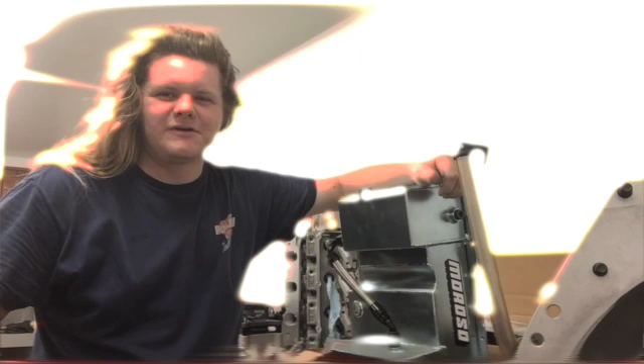I'm Nick Kiefer. In this episode, we're going to check out the build of this tubular back half. Alright, let's build a back half. Got my main frame rails all drawn up.

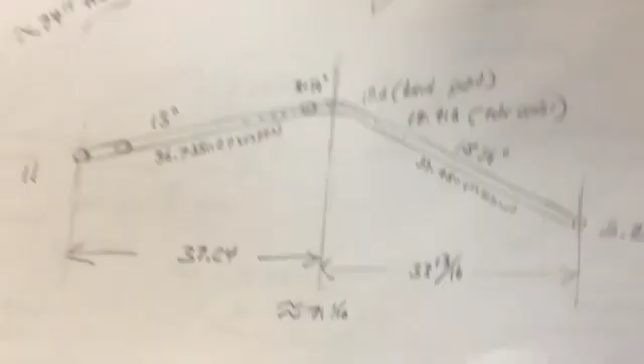And got plenty of space to put them, so I'm going to kind of make an assembly to make sure everything's square. When I put it into the car, it's going to mount up to the number 15 bar there at either of those points where those upright number 18s go, and it's going to have a cross member that'll tie right into that cross member there that I'll put in later.

So it's going to have plenty of other stuff triangulating it and bracing it, but that's the main gist of it. But for now, I'm bending a couple curved tubes with some cross members and a crossbar for the back that I already cut and cleaned up.

And the parachute tethers and rear bumper mounting locations and all that will go to that tube, and that'll go across the rear at the back of the rear frame rails. So I'm about to cut them and bend them and then set them up and start making that sub assembly.

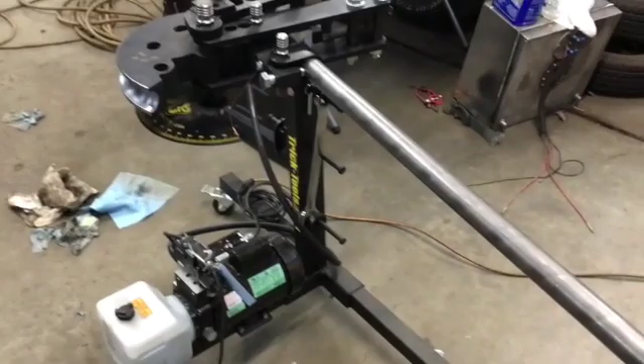Got the tube all set up for the rear frame rail. Got it zeroed out. It's time to give it a bend. And I'm gonna bend the other one and compare them, and obviously try to hit my target angle 31.5 degrees, but more importantly, I want them to be the same.

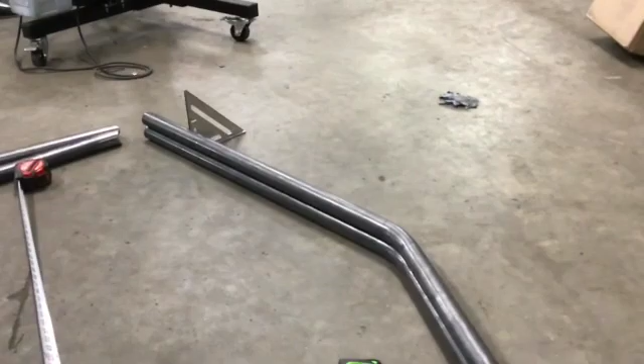Getting the rear frame rails notched and just checking to make sure they're congruent, and getting ready to make the notches at the other end here. I got these two cross members made up in addition to the rear cross bar there. So next I'll be able to set it all up and tack it up and get it started once I make those notches at the tail end here.

Alright, getting ready to notch the rear of this second frame rail. Got this one notched up on both sides, and gonna cut that one and then dress the end and make sure they're congruent, and then everything should be ready to tack together.

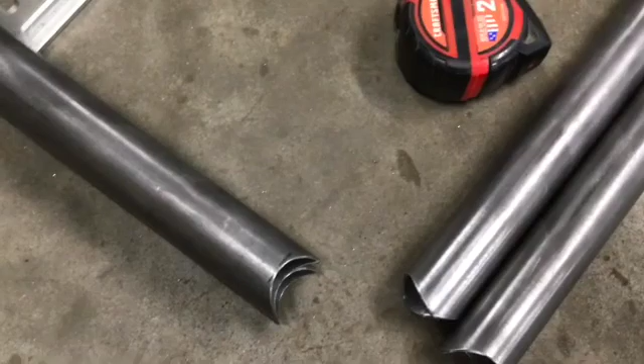Alright, sweet. Got them cut and cleaned up and matched up. So they are a perfect pair. And next, clean the ends all up, clean the insides of the tubes up, and wipe everything down and square it up, stick it together.

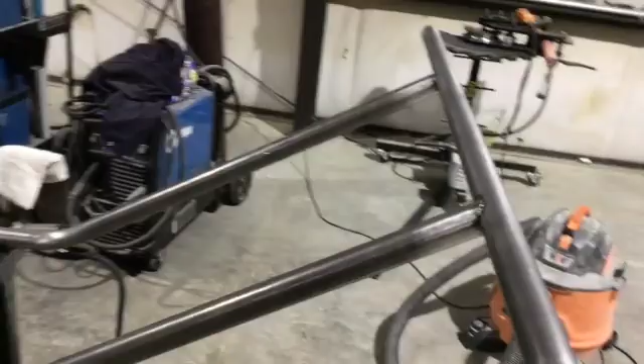Got the main part of the back half tacked up here. Went over to Cut Snake Composites boats to use this nice welding table. Set everything up nice and square. This is still floating, so I can position it where I need later. But ready to fit up in the Nova.

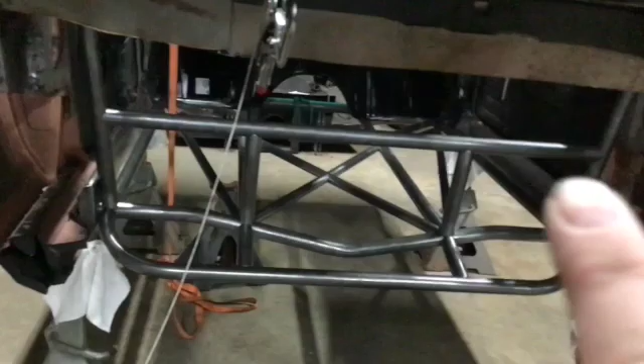All right, back from Cut Snake Composites boats. Getting ready to size this guy up for the Nova here. I need to support the rear of this and in the front, line it up. Those notches fit onto that number 15 main hoop crossbar there. I'm gonna notch these number 18 little uprights here to fit around it.

Everything is kind of coplanar just to keep it strong and all tied together, but it lays on the floor nice and flat, and it looks great. So one almost mistake I made was I did not drill the gas expansion holes for welding this tube in, and I've not drilled this either, but I'm not sure exactly where I'm going to put that. I left it loose so I can still kind of move it fore and aft.

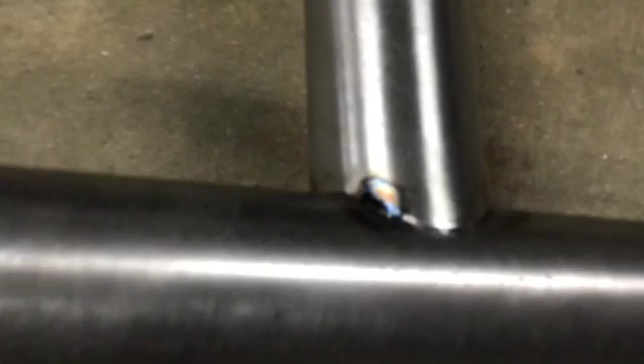So I went ahead and I just drilled them from the outside through both sides of the tubing on both sides, and when I complete the weld and everything's good and sealed up, it won't blow that last bead out. While I had this on the table, I was able to get some nice beads with a couple of dabs each, and some of these joints I put 4 more tacks on just to take advantage of the fact that it was being held nice and flat and square on that table.

So hopefully, since I burned it in pretty good, you can see I just kind of went for a couple little 2 bead stitches on that, hoping that it'll hold nice and true through the process of welding it into the car and moving around into position and everything.

All right, got the rear frame rails mocked up in the Nova. Just working on kind of making sure everything is square and level and all that.

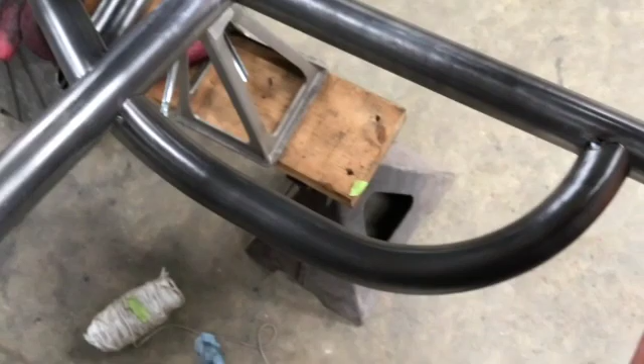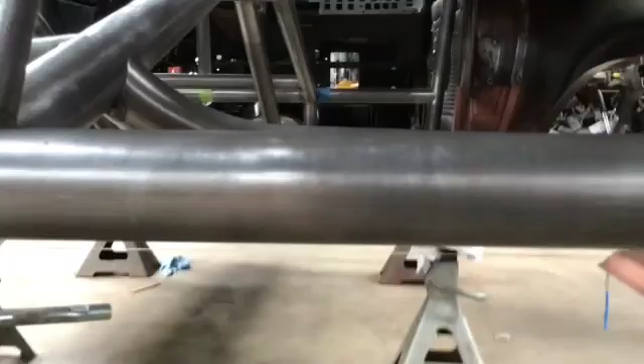All right, so we're going to check out how I made these gussets here that are going to support the rear bumper area of the tail panel that goes under the tail lights across the back of the car here. And I made a pair of them, and they're bent so that this part is level, just to fit with how I want to do the floor in the car. The outside of it is going to be level.

It's kind of going to make a triangle, and then another triangle will go up on the tub up to the frame rail here. So I've got a slideshow that I'm going to play, just showing you some of the processes that took place to make these.

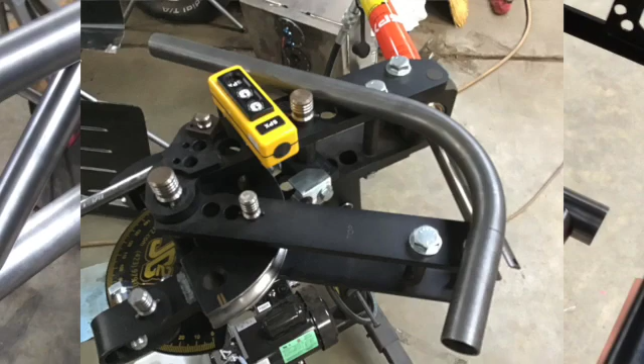So I started by bending, this is 1.5" .065 wall tubing. It's a little smaller than the 1 5/8 .083 wall tubing that I use for the main parts of the frame, but it's a little lighter, and it's what I like to use for a lot of the gussets and stuff. So there's a couple kind of tricky bend operations in the tubing.

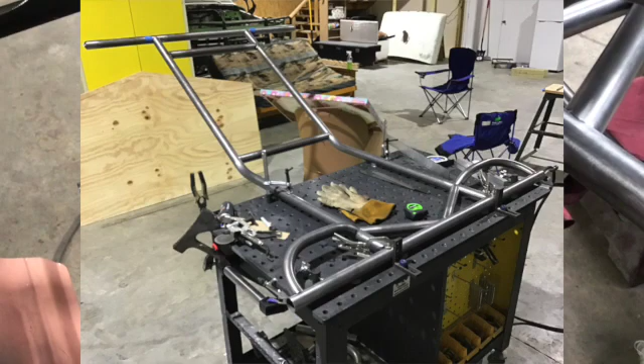The reason I did the tube as I did was for when I went to notch it, it just kind of made the notches a little simpler and easier to line up with the rear frame rails and the rear cross member that goes across the rear of the chassis. And now we'll check out how I used the welding table over at Cut Snake Composite Boats to get these lined up and tacked into the chassis.

Back over at Cut Snake Composite Boats, welded up the gussets for the rear bumper area on the back half. So I still had it loose where I could pull it out of the car. This slides into the main hoop on either side. And measured the angle on these and shimmed them up and got them right where they need to go.

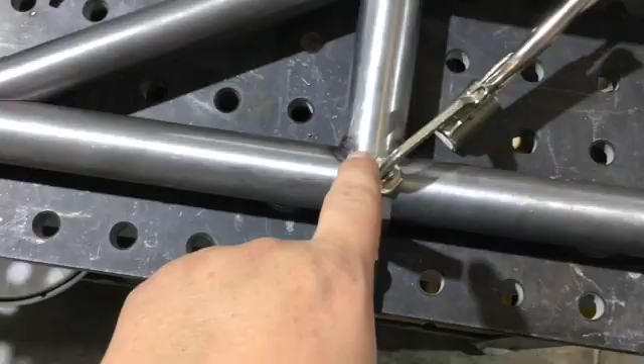I needed to preload this tube just from welding it to the main frame rails here. It had warped just a little bit, so I've got these guys pushing it straight with these guys holding it straight. And pretty straight. So that's nice, got it all tacked up. And time to stick it back in the car.

All right, got the back half back over at my shop, and I was just working on welding where the little tubes are going to tee into this. These two joints that go down to those joints on the main frame rail. I wanted to close them up before they're covered up by the tube. And I welded these up a little bit just to make sure I seal them up before they're kind of hard to get to.

This is the bottom of the back half, so this stuff I'm leaving tacked. I want to get everything in place before I start putting too much heat into it. Get everything reinforced with the upper rear frame rails and stuff like that. So I'm gonna let it cool down, and then make sure this tube is cleaned up. It's actually a number 15 main hoop crossbar, but make sure that's cleaned up inside and out.

And on the tips there where it welds to the main hoop, got a couple hose clamps situated to catch it height wise, and I'm gonna go ahead, and when I put it in there, I'll give it a couple tacks and then get ready to work on kind of the upper part of the back half.

I'm gonna do a hoop in here, obviously my down bars, then some upper rear frame rails and stuff like that. The top of the back half ties into the main hoop, and eventually the door bars and A-pillar bars and all that via this rear hoop. And so we're going to take a look at how I bent and notched that, starting off with our first bend, and then second bend, and it just has those two bends. And then I'm going to show you how I notched it and fit it up in the car.

All right, I made the first bend and just measured everything out to make sure the angle's right and that all the dimensions I'm getting right, and we're looking good. So I'm gonna stick the other side in the bender, and I like to bend kind of from the center on stuff like this so that it's more symmetrical, because the bend looks a little different at the end than the beginning. So it's just nice to go kind of out from the center.

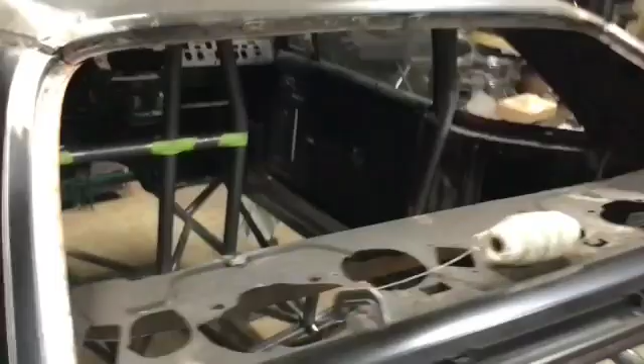All right, got it all bent up, 72 degrees on both sides. And now it's time to set it up for some notches so I can get it fit up to the main hoop. Got it set up to notch. This angle is 11 degrees and this angle is 10. And that is to account for the main hoop lean back, as well as the angle of the lower parts of that hoop, where that hoop's gonna go onto, where that meets up.

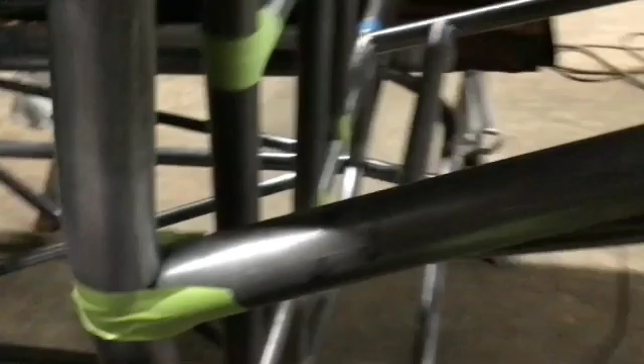All right, one notch down and one to go. I'm gonna cut this thing and we'll see how it fits. All right, I've got the rear hoop mocked up after notching it, and fits pretty well. It actually kind of clicks in because the notch goes far enough inside. I'm going to tweak the tubes a little bit to bring them together. I've got it tucked in there, but it's sprung out just a little wide, which is good.

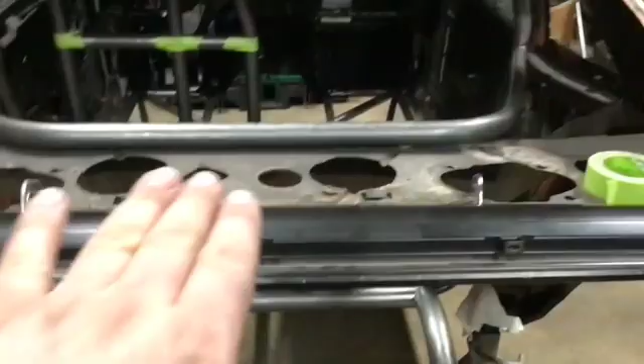This package tray isn't really even. You can kind of see it's sagged right there, but looking at everything else, I've got it pretty much set up level in here and it looks pretty good. I've got the rear hoop fit up and notched up nicely. It's looking good. Been working on making sure everything's nice and level. Got the notches looking sweet, and pretty much cleaned up and ready to tack on.

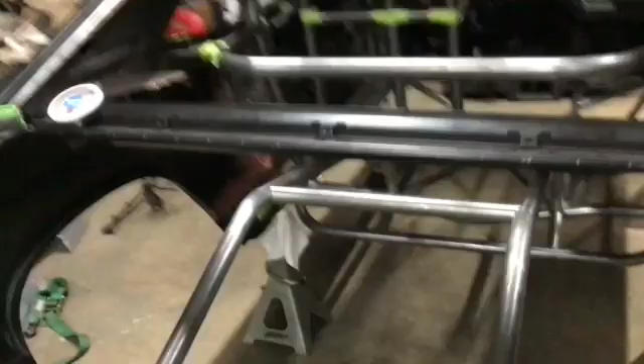Well, I've got the package tray out of the way, and now it's time to add some more tubes to the back half. All right, I'm making some headway on the back half here. I've added this tube to triangulate the structure, and I'm working on making these uprights here, which will be accompanied by some tubes that'll support where the shocks mount, and then some rear upper frame rails that'll go all the way back to this area.

I've got both triangulators in to support the rear structure in the car and make it rigid with the front part of the cage. And I've been working on these connectors here, and pretty cool complicated notch here, lots of angles and stuff.

So here's like a super crazy thing that I've figured out. This is 1 5/8 tubing, and you can see this tube lands right on this curve here, and what I was able to do to calculate the angle, I went ahead and just called that perfectly flat. So this angle that the tube is going down at, basically the opposite of that, I just notched it flat, but I used a 2-inch hole saw, which just fit around the outside of this curve perfectly. It's the craziest thing, and it just works great.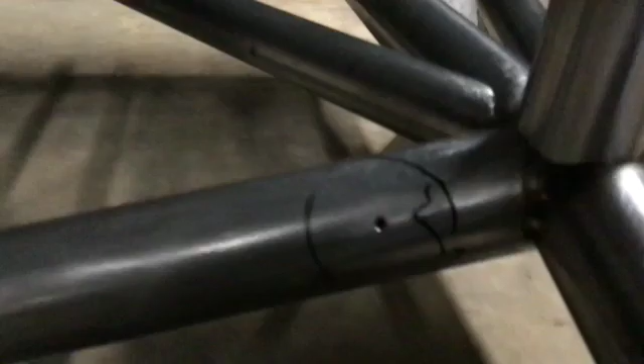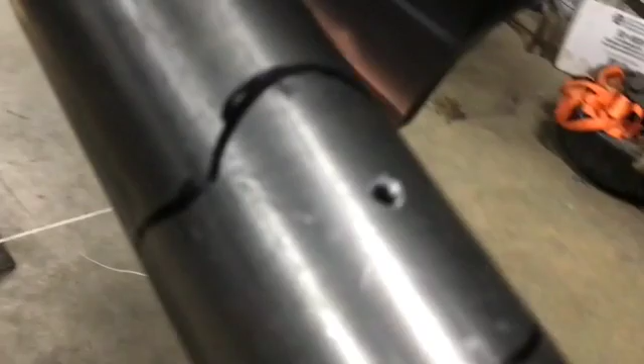Well, I'm back in here getting ready to tack these tubes in, and I've just got everything pulled apart, and I'm going to clean the insides of all the tubes, and I'm drilling all of my gas expansion holes and everything right now while I can still get to everything. So it's going to be nice to have done, and wipe everything down with acetone and start tacking this stuff together, and then move on to X braces and stuff like that.

So still got everything pulled out, and one thing I need to do before I start sticking more tubes in here is I need to go ahead and weld up some of these joints that I won't be able to get to very easily once these tubes are in here. So what I'm going to do is weld in these corners, and I want to go in alternating directions around the tube, and alternate side to side, top to bottom, just to try to keep everything kind of pulled together with the weld equally and oppositely.

So if you're not careful, you can kind of parallelogram stuff like this, where you have things leaning, or obviously you can always put too much heat into something welding it, and that can warp tubes any which way. But a weld tends to warp a tube around the weld, and it also kind of pulls things in the direction you're welding. So for instance, something like this, if I were to weld this way, it's going to want to kind of pull this piece up, and it's also going to bend this tube. So that's why I like to have opposites or joints across from the tube.

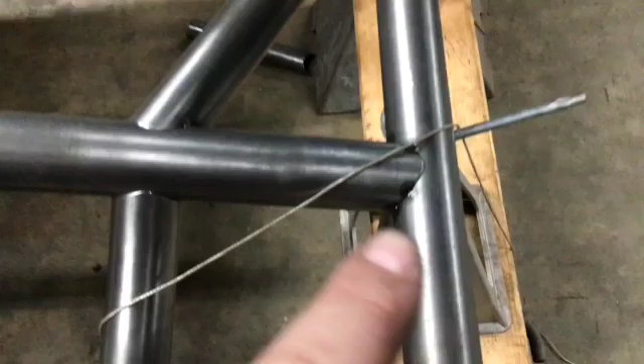In some areas, like the rear cross member here, it's just impossible to do. So that's one reason I do have these gussets, to try to keep this as straight as possible. But everything's really methodical with this, and sometimes you just have to do what you have to do, and just weld what you can get to or what you need to weld. But as long as you think about it and keep everything kind of in sequence, you can avoid some of that leaning and warpage.

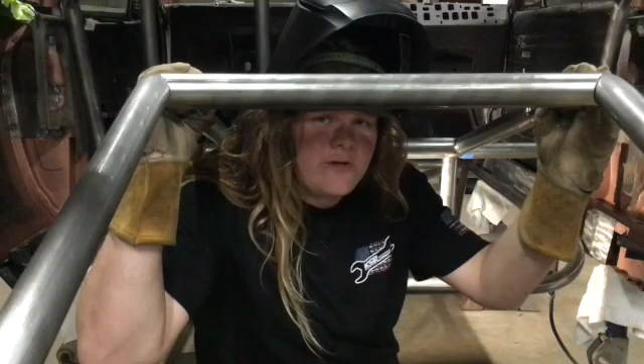Alright, so I'm in here welding up some of these joints that are going to be pretty hard to get to after I put the rest of the tubing in. So now's going to be a really good time to go ahead and seal those up. And then later, once everything's in place, I can go ahead and finish everything else. One reason I want to tack it all in before I finish everything is just to use all these triangulated members to keep the chassis square. So sometimes when you just have some fairly unsupported tubes and you weld them, they can tilt and warp and stuff like that.

So I want to keep this to a minimum, but I want to go ahead and take care of things that are hard to get to later, just so I'm not trying to reach the tungsten way in there and having to contort even worse than I am right now.

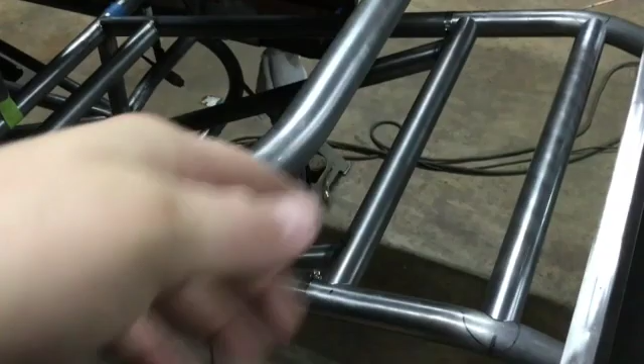So I've been welding these diagonals in a good little bit before I weld the cross member to the frame rails, just so that as I put heat into these and this cross member warps a little bit from the weld, and as everything kind of moves around as I weld, which I've also been welding the bottom some here. Not getting too crazy because I don't want to warp anything before it's all triangulated up, but I wanted to go ahead and do that before I welded this on, just so that I'm not pulling these frame rails around before I get these welded on there. So just kind of avoiding some internal stress and some warpage and misshaping by doing that.

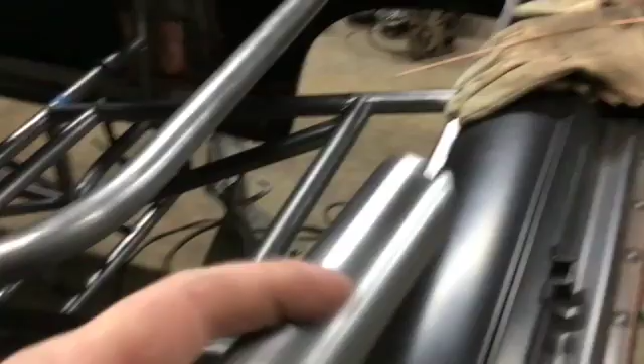But I've pretty much welded those as much as I realistically can at this point. And so I'm getting ready to go ahead and start welding this cross member in. I'm going to need to go ahead and complete the beads on top so that these uprights can fit in here, and they block that weld, so that weld needs to be completed under them, so that's just not left unwelded. But that's what I'm going to work on next.

I'm letting these cool a little bit, once again, just to avoid as much warpage and internal stress as I can, and then I'm going to go ahead and start welding this on, and then tack these guys in. I've already got all my vent holes drilled and stuff like that, even in this hoop here. Might be kind of hard to see, but everything's cleaned out. I'll give it a final wipe down with acetone.

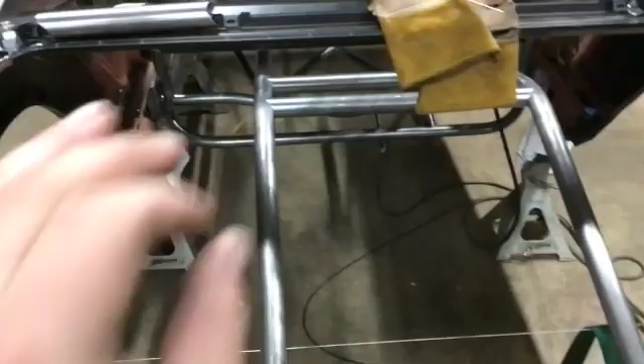Also in the process, my cross measurement from the main hoop to these corners has skewed almost 1/8 of an inch, so I'm gonna use this ratchet strap to pull it back square. It's a little bit this way, not much, just that little 1/8 inch. And I'm gonna go ahead and load it up when I tack that in, since that's a major attachment, these reinforcements to the main rails there, and that should square it up just fine. Once again, not real far off, but I just want to take care of that as much as I can while I can. So we'll zap this up and check it out.

All right, got that pass over the top of the cross member, and ready to position these uprights. I'm gonna probably have to take a little bit off of those points for that weld fillet. I'll just do that with a die grinder, but I'll make sure everything's cleaned up, and I'll let it cool down a bit, and then probably go ahead and tack those in place.

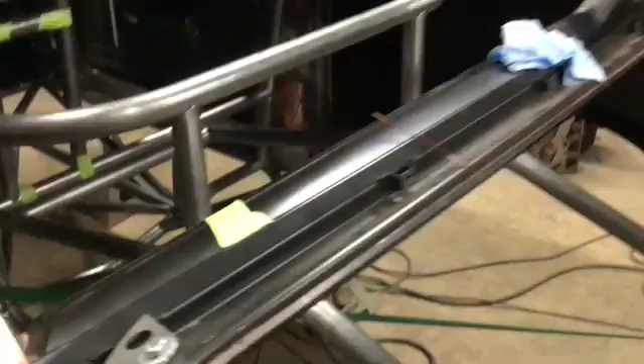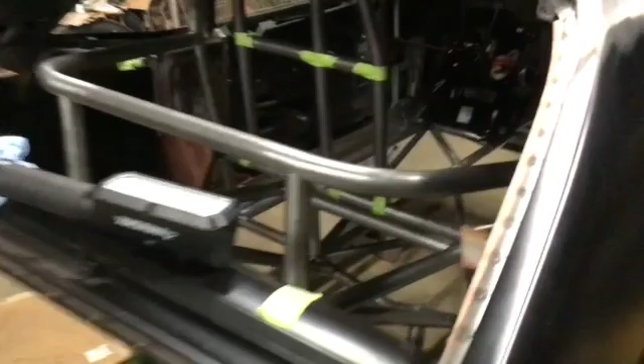All right, I got the 2 uprights tacked in. I measured back and forth a bit to make sure they're nice and even, and everything's dimensionally where I need it, and it's looking pretty good. I'm gonna have to run beads over the back for the shock area gussets.

All right, I've got a bunch of the stuff that's gonna get covered up welded, as well as things that are gonna be hard to get to as I add tubes. Went ahead and welded a lot of this stuff, once again, just because getting to that once this X-brace and a bunch of other stuff is in there is going to be really hard with everything in the way.

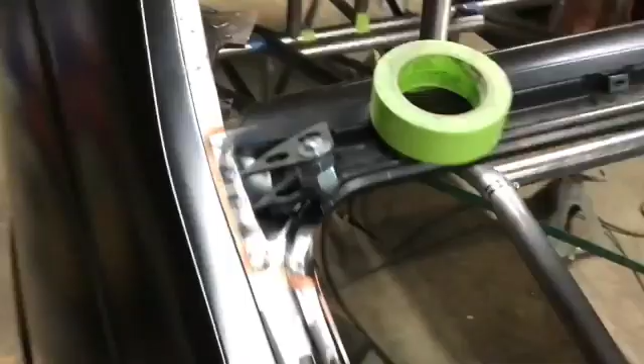I positioned these hose clamps to index this cross member here right on center with where the shocks are going to mount, and this is a pair of the shock mounting tabs. These are from Tim McAmis.

But what I'm going to do is go ahead and notch the inners right here, just to fit right over that cross member when I put these up under the tube here. Since that tube's the same diameter as the tube that it sits on, it's going to have to be notched out a little bit, but that's going to help make sure everything's straight and in line also. It'll kind of interlock and detent in the correct position.

So what I'm preparing to do now is clean up everything to install this cross member. The inside of this is all cleaned up when I went ahead and popped it in, but I want to slide it out of the way, clean that up, drill my gas expansion holes, and then tack it in place.

I'm going to weld over the top, just as these are welded, so that then I can put the gussets for the shock mount area on either side. Then I'm going to weld those in place partially, and work on getting the rear upper frame rails in. And then I need to notch those diagonals I've already made to fit around this tube.

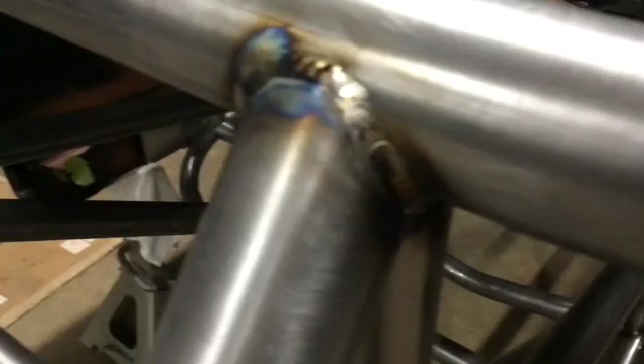All right, sweet. I've started welding these gussets in, and I've got the tops of them all welded in so that I can go ahead and lay the rear upper frame rails in over them and weld those in.

I've got a few beads down here as well. Just didn't want to get anything too hot. It's cross measuring squarely, and it's looking pretty good.

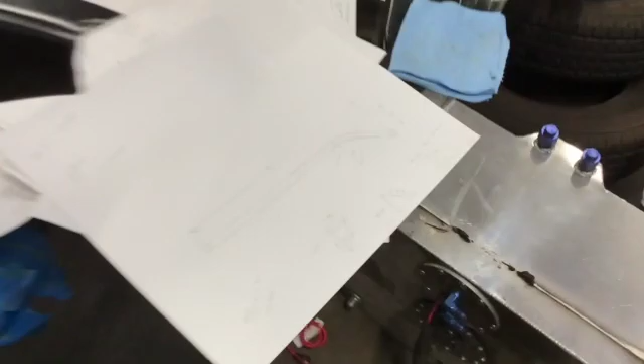So, all right, I got my 2 pieces of 1.5" .065 chromoly cut out, and I'm getting ready to make the rear upper frame rails. This is what they're going to look like. 45-degree curve, and going to notch them to fit that rear hoop and the rear cross member. So they'll go from there to there, and I'll also notch them for these shock area reinforcement gussets, as well as the main rear frame rails.

All right, got the rear upper frame rails fitted up, notched in, and getting close to being able to weld them up, so look pretty cool. I need to weld the joints under either end back here. Just complete that weld that's going to be inside of that.

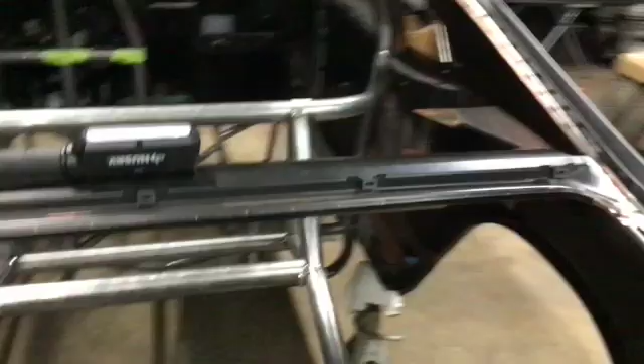All right, I've got the rear upper frame rails all cleaned out. I welded the joints under where they're going to sit, and drilled the gas expansion holes for when I weld them on. Same up top. So everything's ready to go. Just going to do a final acetone wipe down and position them and tack them in there.

All right, I got the rear upper frame rails tacked in, and ended up running some beads in some spots just to get a little heat in them to kind of lean them straight. They're really difficult to line up, so I run a bead there. But just because the slightest little lean obviously made them out of level, but got them looking pretty sweet.

And before I go any further, I want to go ahead and make those truss pieces, and then I can work on welding it the rest of the way in.

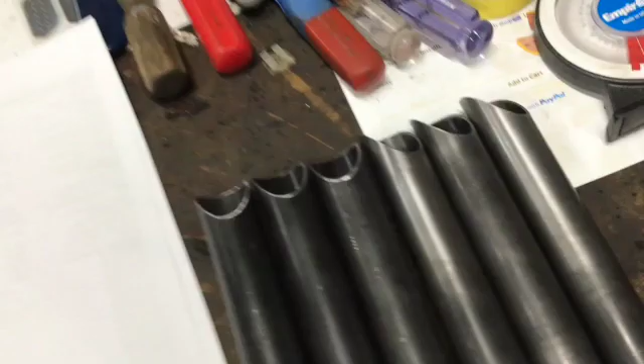All right, I've got all 6 diagonal truss pieces for the rear back half section cut out. They're going to go between the upper and lower rear frame rails, and these are 2 different size tubes. The bottom's 1 5/8 and the tops are 1 1/2. And so I've gone ahead and notched these all at 1 5/8. Just knocked them out all at once, and now I'm going to mark them and go ahead and cut the 1 1/2 size side.

This tubing is 1 1/4, which is what's typically used for like the X's and stuff like that, and the rest of the chassis. I'm putting an X here and another one here, and all that stuff's going to be 1 1/4, so it's just kind of the size that's appropriate for cross braces.

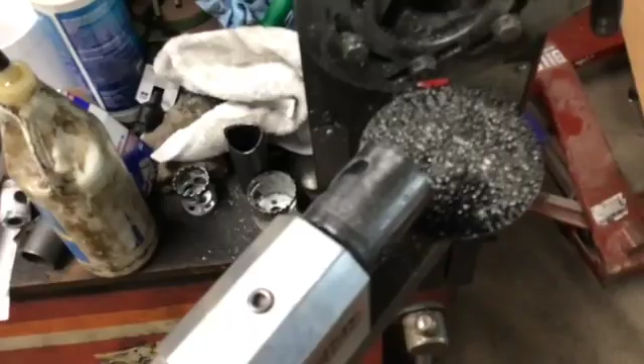But I'm going to set this up with a 1.5" hole saw, and obviously this thing's set up at the proper angle. I made those parallel, so all I have to do is change the notch size and just cut them. This is 45 degrees, so just measure them out. I already calculated the length they need to be, and I'm going to change this out and go ahead and notch.

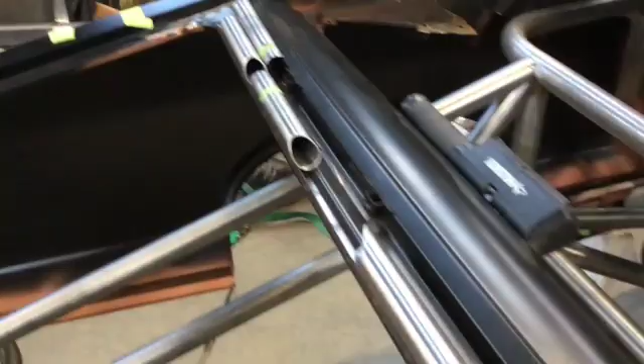All right, I've got all the truss diagonals cleaned up inside and out, wiped down, polished, and I've made not only gas expansion holes but marks where the joint between the rear and middle tubes are going to go on both sides. I've also got holes drilled in the top. Might be kind of hard to see, but I've made holes for both ends of all 6 tubes.

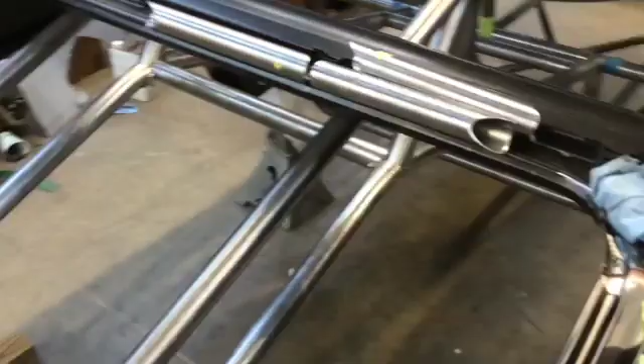What I ended up doing is going to a 35 degree front diagonal, which mimics this shock area gusset, and also distributed the load of the truss a little better. It also allowed me to move all the pieces to where they're kind of touching up against each other on the outside of each joint.

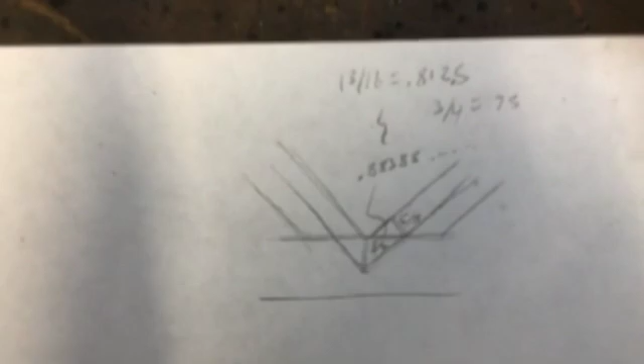I also did a little bit of geometry to figure out where the ideal intersection would be. If I simplified the whole truss just to lines going down the center of each tube, the diagonals would actually overlap just a little bit, which would be ideal on paper, but I think what I want to do is just butt them up against each other, and it would only be just a very small distance. So it's still really close to ideal by structural design, and it should be excellent for real application here.

What I really want to focus on is just getting everything set up nicely and welded in well, so everything's cleaned inside and out. And I'm going to start with the rears, just position the front against that line, tack them in, and just kind of walk all the way to the front. Alright, make sure everything's clean and ready to go. Tack these guys in.

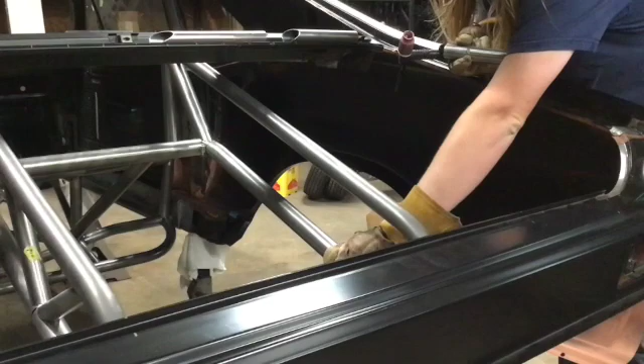Just like the other side, just kind of rear to front. I've used tape here to mark the 1 5/8 radius, or diameter rather. Since this is a 1.5 inch tube and this is 1 5/8, the notches are just a little bit different.

Tops of these tacked on. Then it's on to the front piece.

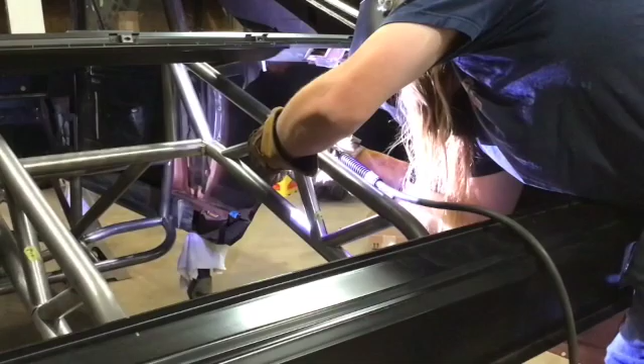All right, let's move on to the front piece here. And again, I've marked it for the big radius that goes on the bottom tube. All right, cool. They're all in place. I'm going to tack the inside now.

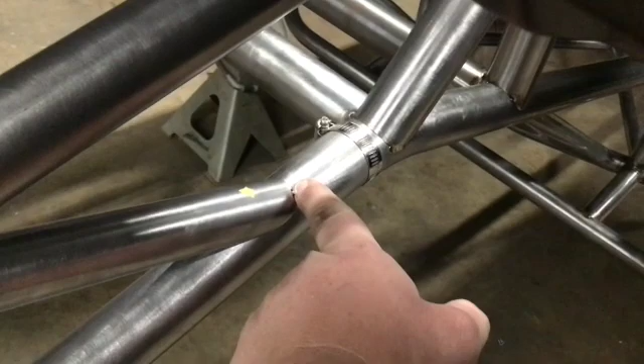When you're tacking, that post flow can act as a really nice pre-flow for your next tack too. But check it out, we're all tacked in, and at this point, if I really need to, I can still break these tacks. Sometimes what I can do is just use a hacksaw and kind of score the tack, and then use a rubber-ended hammer or mallet to break the tube loose.

But what I'm going to do is measure, make sure everything's right. If I need to pop one loose at this point, I still can, but otherwise might just throw some more tacks on here using filler rod for a more robust tack, and then move on to putting X's in up here. I've got the one in this plane, and then I still need to cut, fit and weld in one in this plane here. So it's going to start to get really strong, and I'll show you all what it looks like as I go.

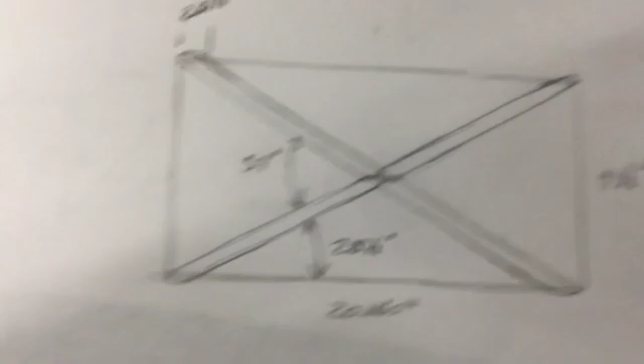All right, so next step is going to be to build an X in this area so that when the anti-roll bar is acting against the chassis while being linked to the axle, this area won't twist and move around. It'll be tied in to both this hoop and the down bars that are going to be going between the hoop and the main hoop up there. I've got it all drawn out, angles and lengths and all that stuff, so just need to cut out 3 pieces of tubing, notch them, and fit everything up, and we'll check the process out as I go.

Alright, I've got the diagonal of this X all cut out and fit up. I'm going to go ahead and drill the vent holes. I notched it a little bit for this weld just to make sure there's room for the tube to sit down nicely. But I'm going to poke gas expansion holes, clean everything up and go ahead and tack this X center in.

Everything's all cleaned up. Got my vent holes drilled. And right now I'm just going to stick that main diagonal in for the X, and then I'm gonna fit up the little pieces that make that into a complete X. All right, I made the upper part of the X and fit it all up.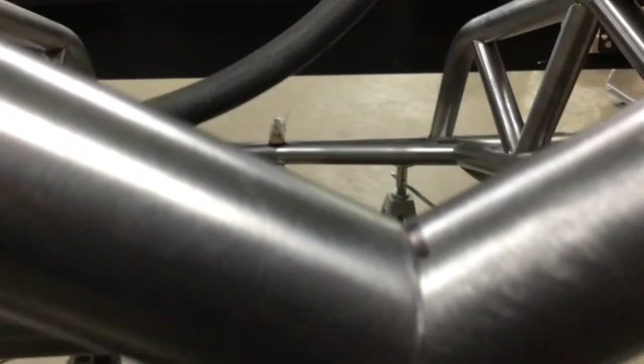That line, the inside of that line, just marks the center of the rectangle that the X is in, so I know that that top triangle is isosceles, meaning that these two sides are the same. So I'm going to go ahead and tack this in and then make a copy of it to put down here. Alright, looking good. Just one more piece to go.

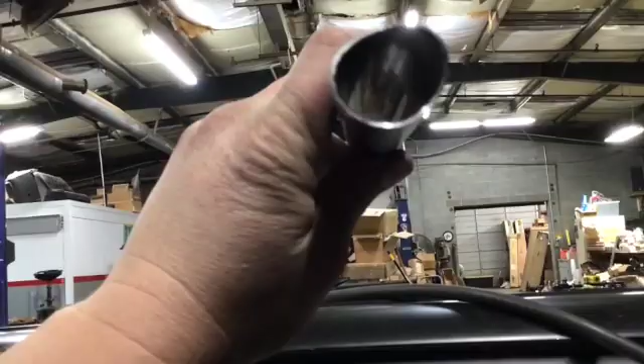Alright, got the final piece of the X notched and cleaned up and ready to stick in there and tack together. Just gonna make sure it's lined up nicely and seated in, and go ahead and tack it. Alright, cool. X is in.

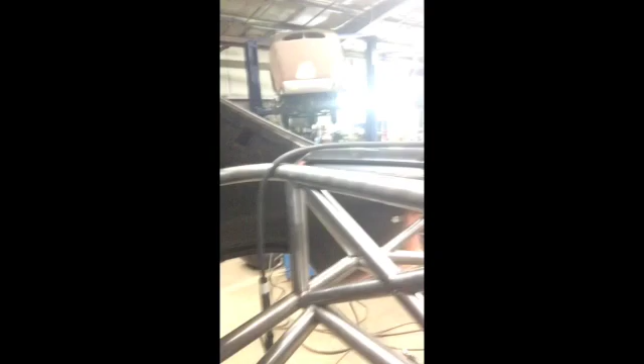Alright, cool. I got the X in, and it's looking good. I made sure that the 2 pieces here were in line and went ahead and tacked them in, and looking pretty good. Alright, I've just been working on welding in some of this stuff that might be hard to get to once I put an X right where I am.

But that's what I'm going to be working on next. I've got the little gusset pieces of the X that go in here, and then they cross this rectangle that I'm residing in right now while I weld some of this stuff up. I will be able to get at all this stuff from this opening here and here on either side, but I just wanted to take the opportunity to burn this in a little bit, and letting it cool right now. Might stick some more beads in here, but I'm thinking I'm getting to where I'm ready to stick that X in and get everything all tacked up and tied together.

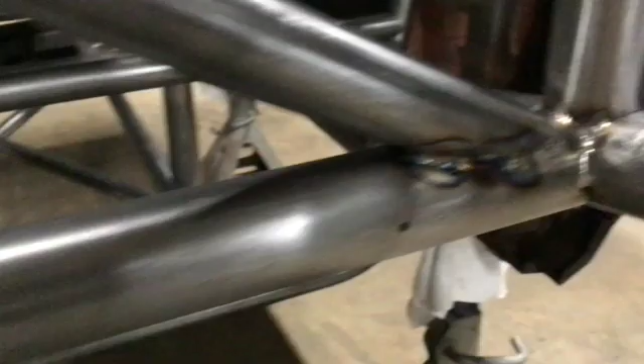Alright, I've got my gas expansion holes drilled and deburred for the first rearward parts of the X. Went ahead and welded this stuff up just because I won't be able to get to it quite as well once these pieces are in. And I sanded everything, and it's all wiped down with acetone. So I think next I'm just going to drop them in and tack them up, and we'll check out how that looks.

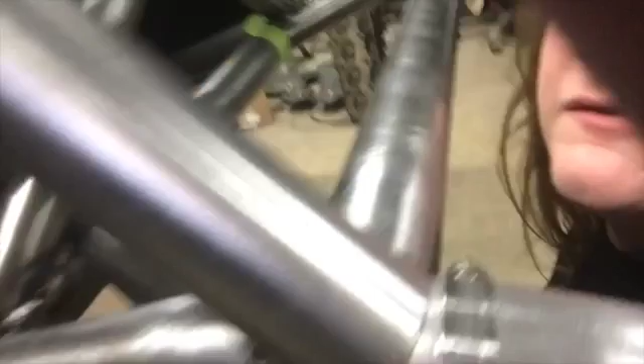All right, cool. I've got the first parts of the X all welded in. What I did is I used these pieces of tape to just make sure they go right in the exact place they need to go, and just clean everything up and went ahead and tacked it on there.

All right, I've got the landing spots for this diagonal all cleaned up and my vent holes drilled, and I think it's about time I go ahead and tack it in, start forming this X back here. It's gonna look good. It's nice and tight, and zap it in. All right, let's get this diagonal in here.

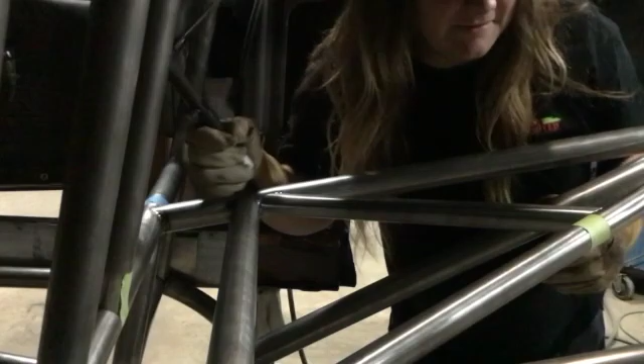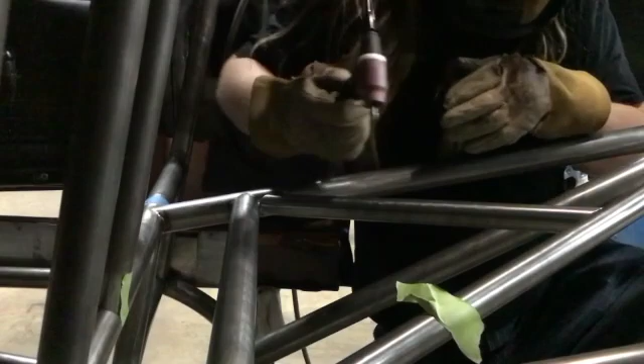It's a lot of work climbing in and out of this thing, but it's all going to be worth it. Peel that off just so I don't get that caught in there or burn that. All right, looking good. I'm going to check this out, make sure it's exactly where I want it, and then on to that last piece.

All right, let's get this last piece tacked in. Complete this X. Let's get it lined up.

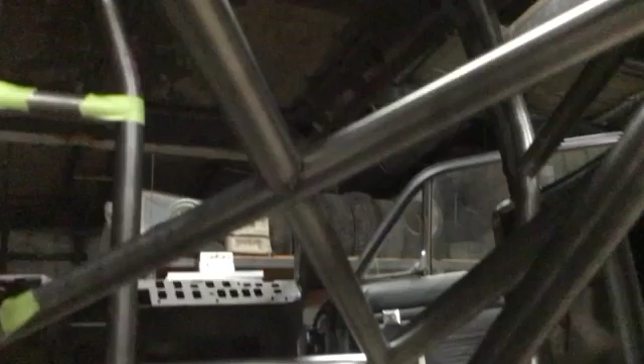All right, cool. That looks nice and straight, lines up, and good to have that X in. Nice. Put a couple more tacks on that X, and it's in. X's are in, looking good.

So these parts of the X here and here serve a double duty. They kill two birds with one stone. I wanted to gusset for those diagonals that keep the rear back half from flopping around, that tie into that number 1 bar there. And they both serve to gusset that area and make up this X.

So I've got triangles, which are strong, and nice gussets, which are strong. So it's a win-win. Looks pretty cool. And this back half is looking like serious business. Well, all these trusses and X's turned out great, and I hope y'all enjoyed the episode.

Join me next time when I accessorize the back half with these shock brackets from Tim McAmis and these suspension brackets from Tin Soldiers Racecars.